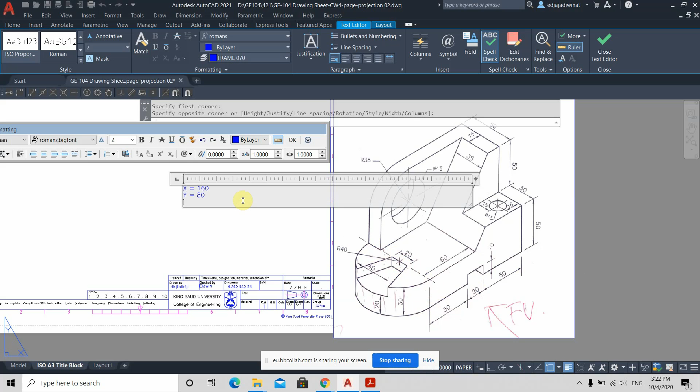100. Let's check together. Okay, 50 plus 50. Exactly, that's 100. Good. So now we have the x, y, and z.

I'll just enlarge the height of the font here. Let's make it 10. See, oh, that's too big. Make it 6. Okay, maybe that's okay. Oh, it's actually not that big. 8. Let's see, 8.

Doctor, did you start record? Yeah, sorry. I think so. Yeah, I think I started it.

Okay, so I'll just put it. Since we are going to have left side views, I will put it here. If you imagine, if you're going to make the left side view, that means here will be the top view location, right? This is the front view here, left side view there, and the top view here. So that's why I put this information there, so that it does not interfere with the top view.

Do we have to write it? This one? No, it's not. I made that just for you. Clear. Yeah, just for you.

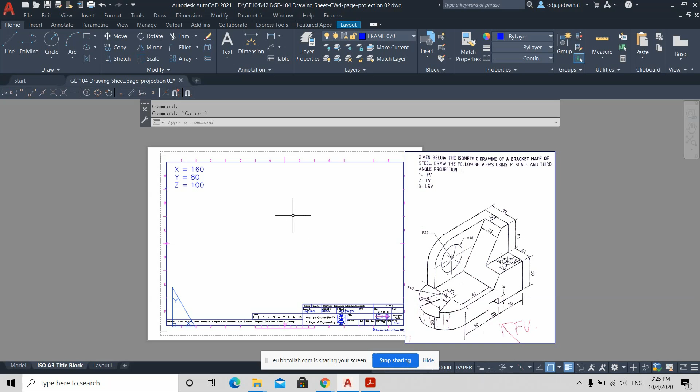So now let us do the other way. Let's make it exactly. I just want to show you how to make it exactly according to the A and the B. Anybody knows how to calculate the A and the B? Okay, let's do that together. You will have something like this, right? So B equal, can I give you the relationship that gives us the B?

Just a moment. Let me make this first before you inform me. Oh, okay, I did a mistake. I'll just Control Z. There. Okay. This is a random drawing. It's not the correct size. Okay, so this is the A. This empty space here, and here is called the A, and the empty space this, and that one is the B, right? Yes. Okay. So you can go ahead and inform me.

What's the A? A equal 400 minus x minus y. Oh, you mean, okay, if I put the brackets, it should be x plus y, right? Over 3. So over 3 will be the whole thing. All of these will be over 3. Okay, there. How about the B?

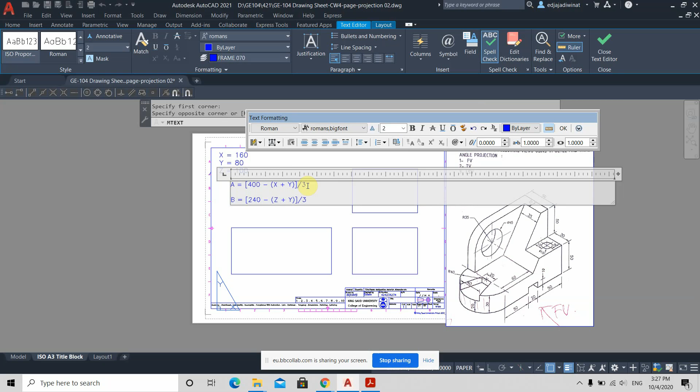240. Okay, 240 minus z plus y. Okay, z plus y in brackets, over 3. So you've got this as the equation to get the B. There. Okay.

So let's make sense of this equation. So the A is this empty space, right? So where does this come from? It comes from the size of this paper. So if I measure from here, from this corner to that corner is 400. Can you see that it's 400? Yes, we can. Right, the horizontal yellow line, if you look at it, it's 400.

Okay, so 400, your target is to find the size of the empty space. Then you need to minus the length of this line and that line, right? So this line from here to here is the x, and from here to here is the y. So that's why you add them together, x plus y. So 400 minus the combination of this line and that line. And the final result, you divide it by 3. Why? Because you have 3 empty spaces. 1, 2, 3.

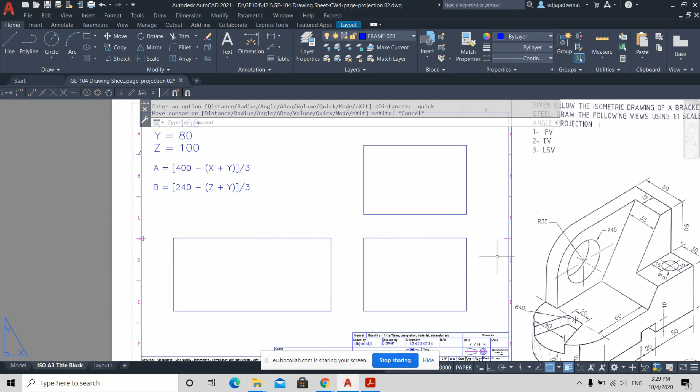The same thing with the B. If you measure this distance, you see it's 240. So actually here is 141. It's not a problem, only 1 millimeter difference. The function of A and B is just to make the location of your drawing approximately at the center.

Is that clear, everybody? Yes, doctor, it is very clear. Okay, good. So let's find what is the A and B. So that will be, if you calculate,

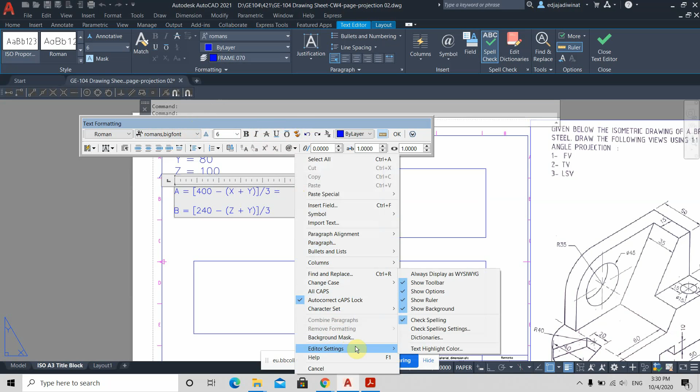this thing is, okay, I will turn off this thing, the text formatting tab or something. If you want to turn that off, do right click, editor settings, show toolbar. Yeah, you call that toolbar. I will just turn off the toolbar, because you can work from here if you want.

Okay. So let's calculate the 400. I'm using calculator here. So x plus y, what is the x? 160 plus y is 80. 160 plus 80, or 400 minus this, divided by 3. So we got 53.3333 and so on. Let's just put 53.3.

Okay. And this one, this will be 240 minus, inside of brackets, 100 plus 80. Z plus y, 100 plus 80, okay. Divided by 3. So it will be 20. There. Okay. I will delete this.

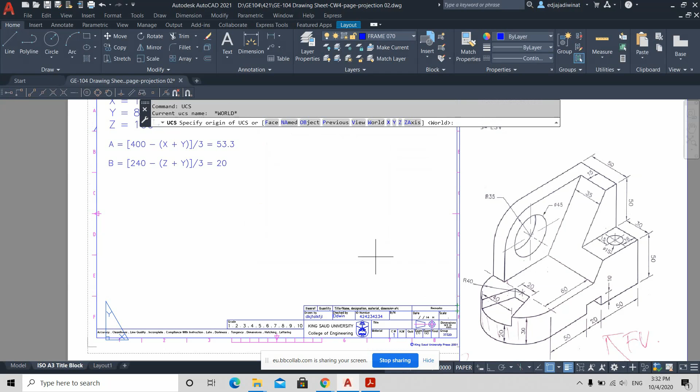Okay, let's do the work. I will use the UCS. I will move the UCS here. Sorry, I think I did a mistake. UCS. I will move it here because I'm going to make the first box the front view here. UCS is moved there. I'm happy with the position. Press enter. So I will use the rectangle command.

What is the front view? It will be the X and Z, right? But before that, you need to type the location of the first corner. So what is the location of the first corner? It will be somewhere here, right? Anybody can help me? What is the coordinates? We know already the A and the B.

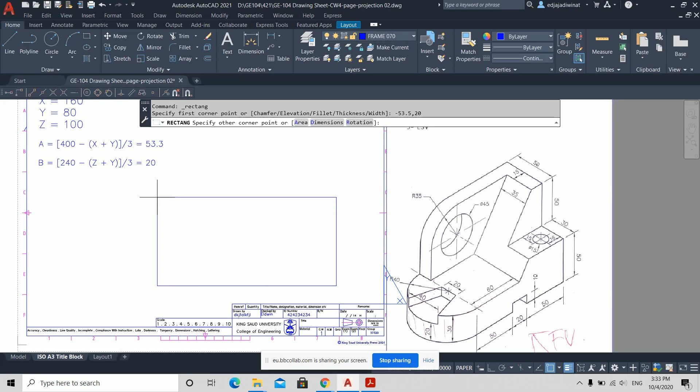So you must know where the first location. Minus 53.3, comma 20. Exactly. Good. So that is your first corner. And the second corner will be somewhere there, right? So now it's related to the X and Z of this object, not the X and Y of the AutoCAD coordinate system.

So it's different. So that means you will go at minus 160, comma 100, right? Do you understand that? Yes, doctor. You need to use symbol at, because this value is relative to the first point. Minus 160 because it's going to the left, comma the Z is 100 because it's upward, so it's positive. There.

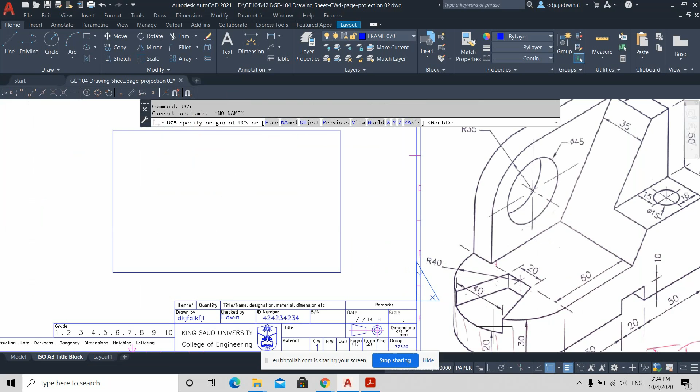Excuse me, teacher. For the UCS icon, how did you put it there? Use the UCS command. Type UCS and then enter. And then, of course, you need to turn on the object snap so you can catch this corner, the endpoint here. Then just click. And finally enter. Click origin or no origin, which one?

Let's repeat that. UCS, enter. If you read here, specify origin of UCS, right? So you just click there. And then specify point on x-axis. You don't need that because you are happy with this. So directly accept by pressing enter. Is that simple? Thank you.

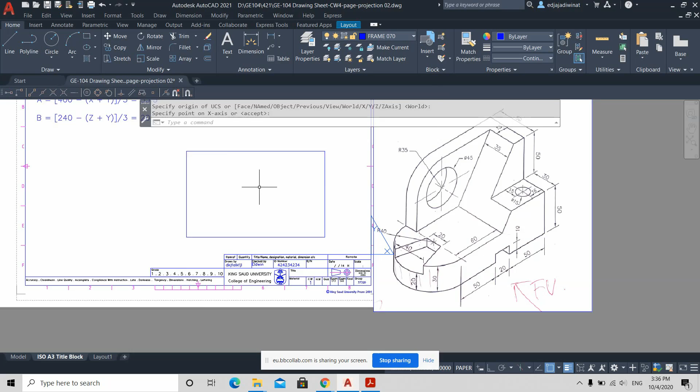Doctor, I can do it in another way, by clicking at the corner and putting a line and going 53.3 to the left, then you delete the line, right? Yeah, sure, you can do that. This is the technique that I showed you at the beginning, long time ago. So it's up to you which technique you want to use. That's why I gave you many options so that you know many ways.

Doctor, A is 53.3, right? Will we deal with it as 53.3 or approximate it? The A is this one, can you see in my screen? If you want to make it exactly or very close to the center, just make it 53.3. Make it accurate. It doesn't matter, because this is AutoCAD. This is not hand drawing.

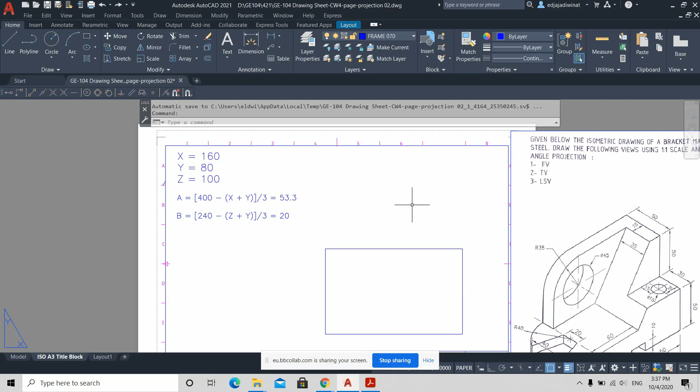And again, I would like to stress that A and B is not something rigid. Rigid means fixed, something that will really decrease your mark if you don't make your drawing really at the center. Okay?

Excuse me, doctor. I'm really stuck on this bottom left corner, the axis. I don't know how to move it there like you.

So where is it located now? Bottom left, yeah, this is because it's like flipped. Okay. So if you want to refresh, you just type UCS. And then if you see here, it's world already. Now it's okay. Forget about what I said.

If you want to return back to the original one from the AutoCAD, you just press enter. After you type UCS, press enter. Okay, now you will see your coordinate system is here, right? And that's because you did not turn on yet the origin position.

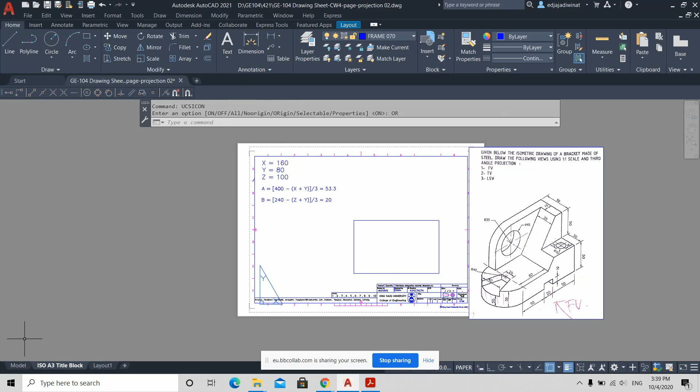So you go to UCS icon. You will see this option. Just click that, and then press this origin. Okay, now it will show exactly the location of the 0,0. So previously, if you don't turn that on, it will show the direction of the X and Y, but it's not showing the location of the 0,0.

Okay, just leave it there. Or you make a UCS command again and then put it here, put it on this location. If you don't feel comfortable using UCS, you can use the one that was used by your friend using the helping line. I got it, teacher. Okay. Thank you. You're welcome.

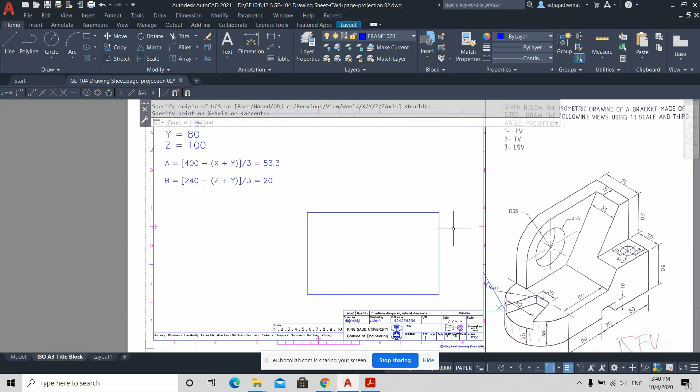Teacher, are you drawing the top view or the front view? This one is the front view, of course. Yeah, this is the X and the Z. So if you want to make sure, you use again the measure tool here on the top, on the ribbon. Measure, and you go there. So the horizontal is 160 and the vertical is 100. That means we are correct.

We can continue. I'll make the region for the left side view. A rectangle command as usual. And again, I'm using the extension object snap. Make sure the extension object snap is on. This object snap is to help you to make something on the extension of a certain line. For example, I want to make a point or start a line on the extension of this line, so you will use this, like what we are going to do now.

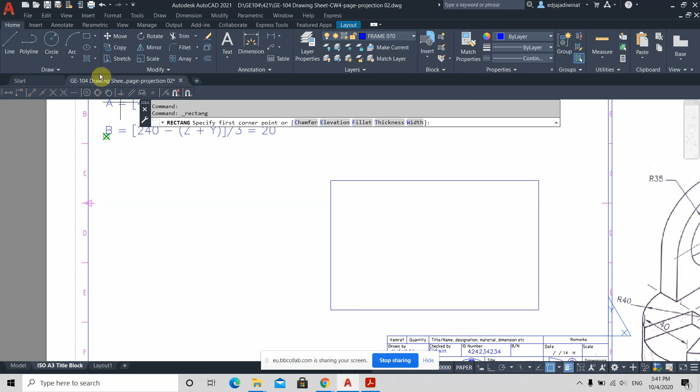Okay, I will use again rectangle command. I will go to this line first, to the end of this line. And then I will type the distance that I'm going to make here. The A will be 53.3, right? 53.3. Yes, teacher. That's right. Okay. So there you have it.

Now the second location will be the Y and the Z. Y is 80, the Z is 100, but you have to make it minus Y. Use the at symbol, minus 80, comma 100. There. Okay. See, 80, 100.

So use rectangle command again. And here we go up. This should be 20. And then this has to be at, as usual, and again this will be minus 160, comma, what, 100 or 80? I think 80. 80, exactly, because this is the Y. The vertical line is the Y of the object. There. Okay.

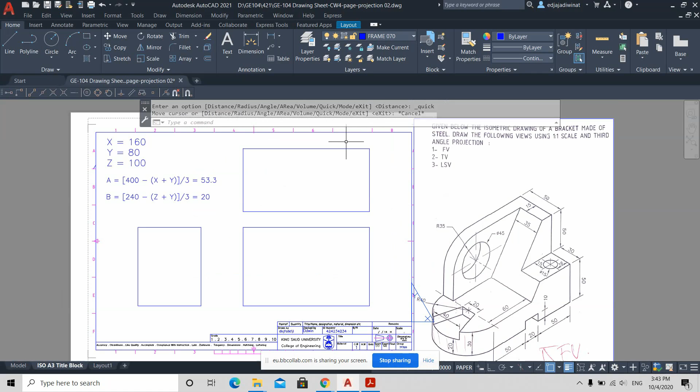So now you have nice views or regions to draw your view, and the distance is A and A exactly, and this is B and B. Of course this one will not be exactly 20, right? This will be maybe 21, because the distance that you have here is not 240 but it's 241. Again, this is not an issue, this is not a problem.

What is the important thing? You have the correct sizes of your boxes. You need to remember that you must have the correct size of the box. That is the most important thing.

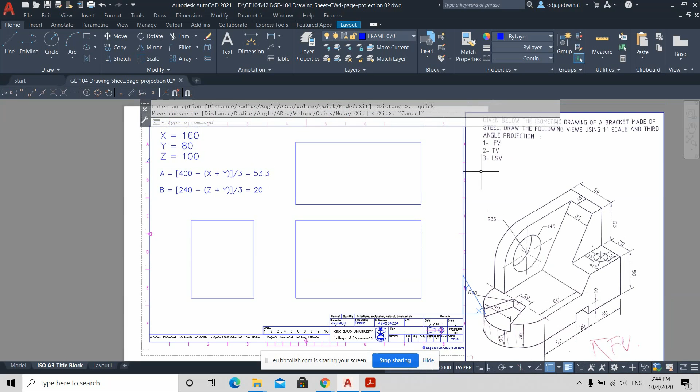Okay, so let's start making the front. Left bottom box, can you give the X and Y or Y and Z? Yeah, the size is 160 and 100. Can you see that? No, left. This one. It's 80 and 100. So the horizontal is the Y of the object, and the vertical line is the Z of the object. Okay, clear?

Okay. So let's make the object. We'll make the base. Okay, let's make the base. So if you see, the base is 30. So what I will do, I will offset from here, from the bottom of the base to the top of the base, which is 30.

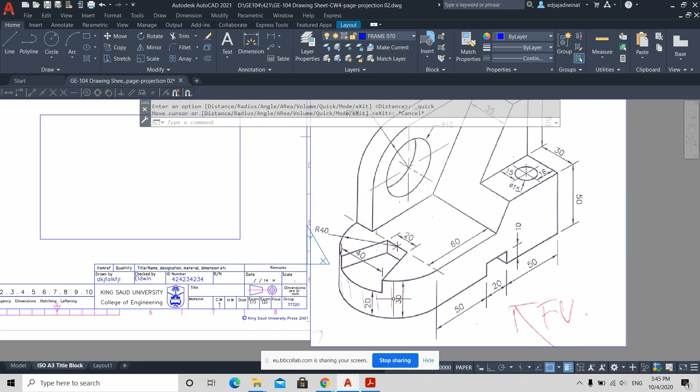However, if you see, as usual, when you make a rectangle using the rectangle command, they are connected. So you have to use the explode command to separate them. So use explode, select all of the rectangles, then press enter. So now they have been separated.

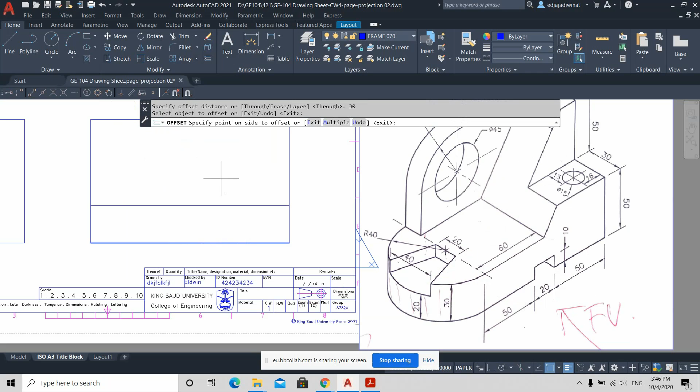So let's do the offset. Offset distance is 30, enter. From here, this is the object that you want to offset, and the location is above that original line. Okay. So we obtain this line already. And what's next?

Let us make this tunnel. There is a small object here. It's the tunnel here. Okay. See, so it is 50 from the right. It's 50 from the right. So you can use the line command.

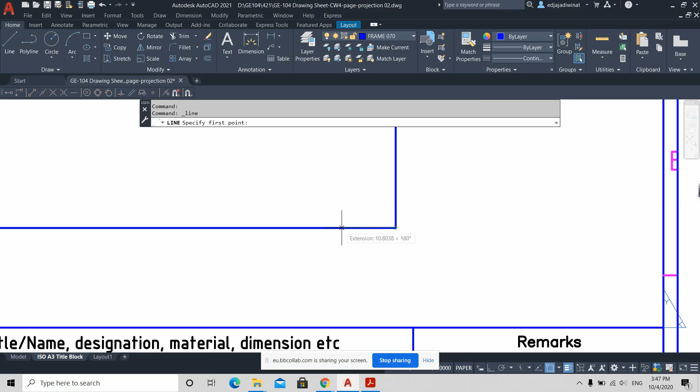So you go to this corner because this point is here. And you go to the left. Make sure that you turn on the extension. Okay. So the extension object snap is on. Extension is on. So don't go there, you go to the left. Okay, so you want to go 50 to the left, right? 50.

Let me try something. So here, if you put minus 50. So it's possible if you go to the right and then you put minus, then it will flip to the other direction. For example, like I do here, I go there, then I type minus 50. Then I enter, it goes there. Okay. Then you go upward. Now my line is able to go in any direction.

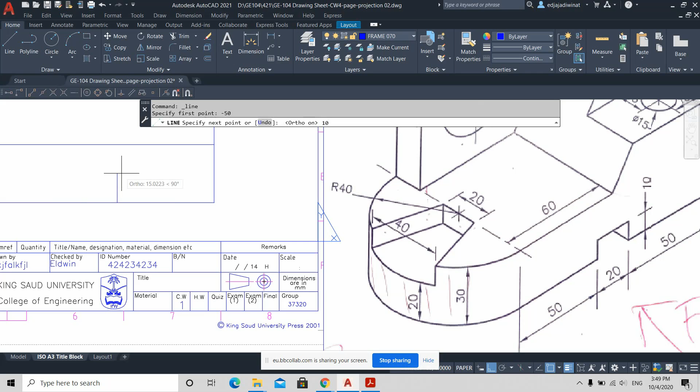To make it fixed, only vertical and horizontal as usual, turn on ortho mode. So when you're using ortho mode, it will only go vertical or horizontal. So you go in the direction you want to create your line. Okay, so it's 10 upward, and to the left is 20. Then downward, you just use the object snap until it cuts there, until it is perpendicular. There.

Okay, so see, it's 50 from there, and the size here is 20 and 10. Can you see that? Is everything clear until here? Oh, yes, it is clear. Okay, good. So if you want, you can trim the line on the bottom there now. Of course, if you want, you can use offset several times and then trim things. Can you imagine what I'm saying?

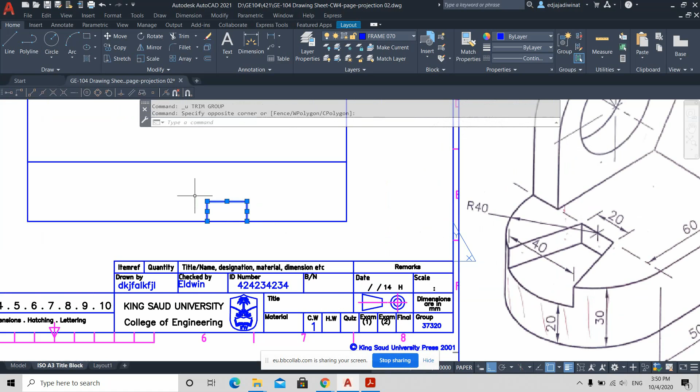Doctor, can you repeat how you did the tunnel? Okay. So I will just show you another way so that your other friends can see it. I've showed you before how to make the tunnel using the line command and the extension object snap. So if you want, you can also use the offset. Okay, I will use offset.

So I will make offset from this line 50 to the left. So the offset distance is 50. I'll make it like that, 50. Okay. Then I'm done. Escape. Then I know the distance of this is 20, right? So again, you make an offset 20. From this object, I want to go to the left 20. So you click on the left of that line, press enter.

The last thing, you know the height of this tunnel is 10. So you make offset 10 from here up. Once you're done, press escape. So this is your tunnel. Let us clean up by using trim. So I trim this, trim that. There. Okay. Also this one, sorry, I forgot to trim this. There. Okay.

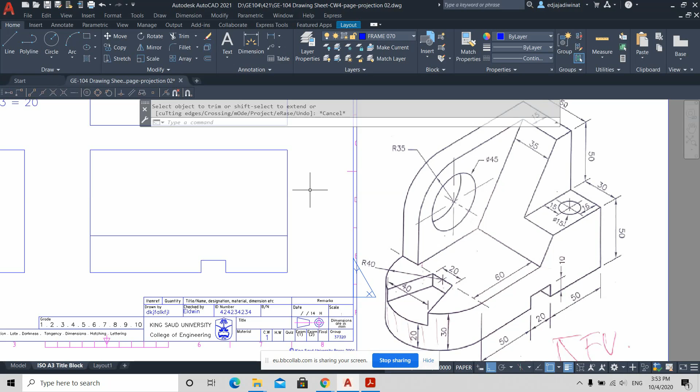Maybe some students don't really like to find what the coordinate is, I mean the x and y. They prefer, okay, what's the x? They do the x, and what's the y? They do the y. Then they trim. Maybe some others don't really like to trim. I will just make directly x y x y. So it really depends on you. I'm just giving you guidance, many options. It's your decision in the end. Is that clear?

Okay. So let us make this inclined region. Where is it? Where is this edge located? With the tunnel? Maybe, but there's no information. Middle? Middle could be. Okay, so if there's no information relating the tunnel to this thing, don't make a guess. That's dangerous.

You must be sure. It's 50 from the right? Exactly, I think from the right. I don't know, but I know from the left. If you see, this is 60. 60 from this line, which is the center of the half circle, the diameter of the half circle, right? So this is 60 plus what's from here to this edge?

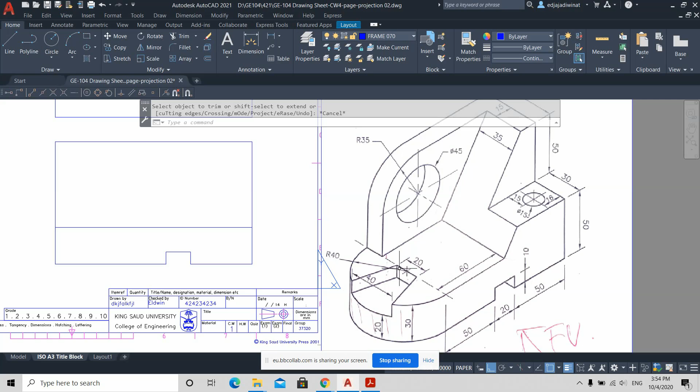40, exactly. So what's the distance? 10? It's 100. Yeah, it's not 10. It's 10 centimeters, but we are talking about millimeters here. Okay, so it's 100. So 60 plus 40. If I'm going to make it from here, it will be 40 plus 60. So it's 100. So I'll make offset 100, from here to there.

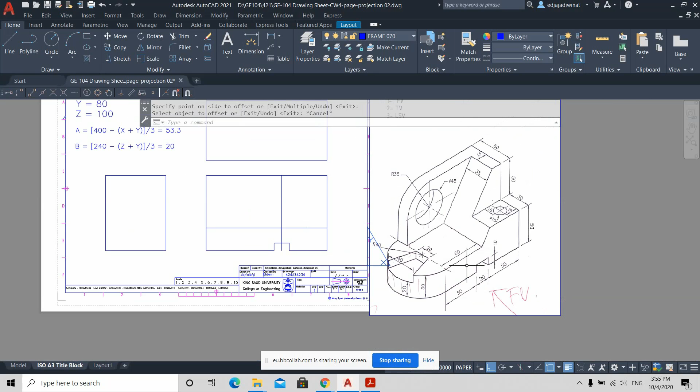Yeah, it seems at the center, but initially you don't know. At the beginning you don't know. Don't make a guess in a technical drawing. You need to make sure it's informed explicitly in the drawing. Like this one is explicitly said 60, and this one is also explicitly said it's 40. So 40 plus 60, it's 100.

Okay, so you know this point already, and then you need this point. So you can do offset 15 from here to there, because it is 15 there. It's given. Then you need to connect from this location to there. And of course you can delete these two lines, because these two lines are just to help you find this point and that point.

Okay, so what's the next step? Let's make this surface. If you look at it from the front view, you will see this surface as a line, which is this line, right? So I'm going to make a line, 50 from the bottom goes there.

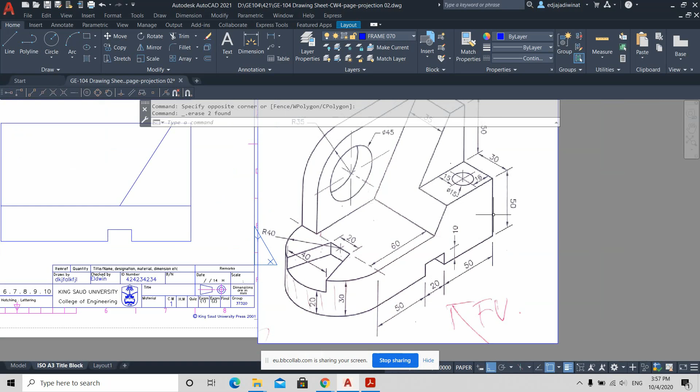So I will use a line command. Of course, you can use offset 50 from here if you want. You go there, and then you trim. It's also possible. Or you can use the line command: go here, type minus 50, so it goes up there, and then you just click there. It's up to you.

Of course, you will not see anything here on the surface. See, it's empty here, no edges. So this thing doesn't exist. You need to trim that. Okay.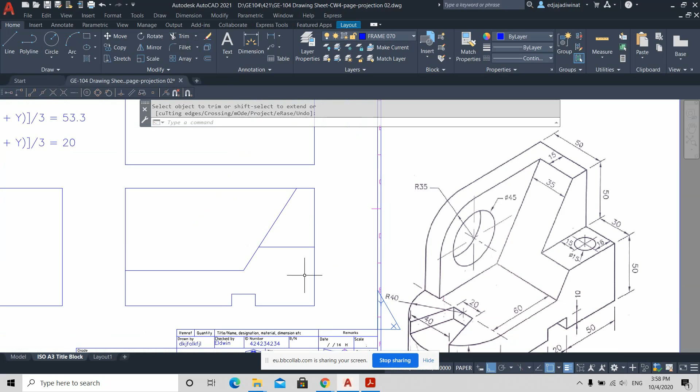Is everybody following? Do you understand? Yes, teacher. Okay, great. Just 1 minute, we are drawing. Oh, you are drawing it? Okay, good. Can I wait a couple of minutes? You can go ahead, draw. Okay.

The next thing, we'll make this wall. Okay, I'll continue. To make this wall, again, you need to find where it is located. It's clear that from this edge to this surface is 40, right? This radius. So you can make an offset 40 from here to there. Then you can trim these two lines because you don't need those.

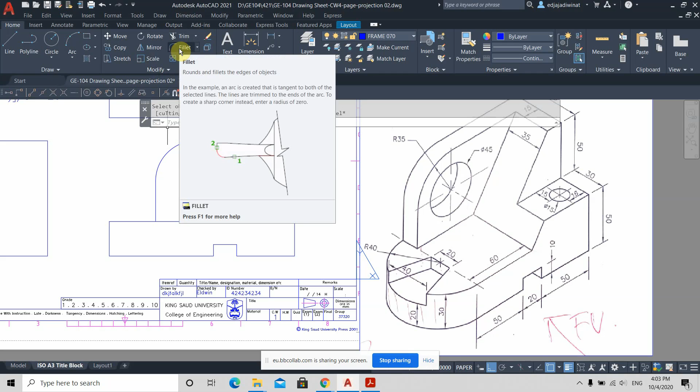Anybody still remember how to use the fillet command? Yes, I think we do remember, but for the circle you made, where's the first point? It says specify the first point. Or for the circle, the TTR command. Yeah, I did the TTR command. Now I should specify the first point. Yeah, so the first point is simply anywhere on this line, close to this region. There is no fixed location. AutoCAD will decide depending on the radius.

Okay. So you just click anywhere here, approximately. Here, and then the radius is 35. There. Okay. Yeah, I did it. Thank you. You're welcome. And you can trim here, trim that, trim these. There. Another option is using the fillet command. You can look it up in the previous videos or on the internet, how to use that.

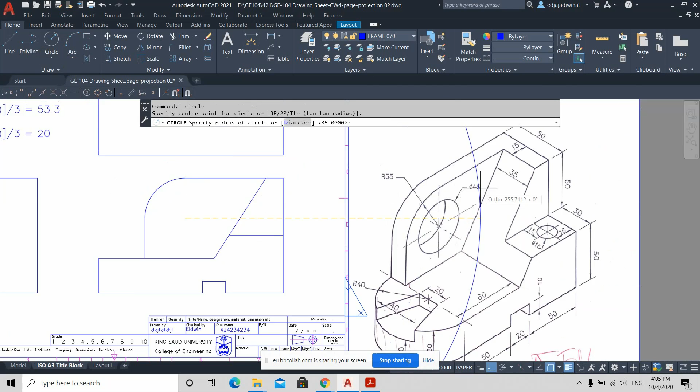Okay, next, let's make the big circle here, the full circle. And you catch the same center as the previous circle. And the radius, what is the radius? This is 22 and a half. Yeah, 22 and a half. Okay, just in case the number is bad and you don't have a calculator and you are lazy to calculate by hand, it says at the beginning, specify radius of circle or diameter. So you just click diameter if you don't want to calculate the radius. So now it's asking you the diameter instead. Okay, so just type 45.

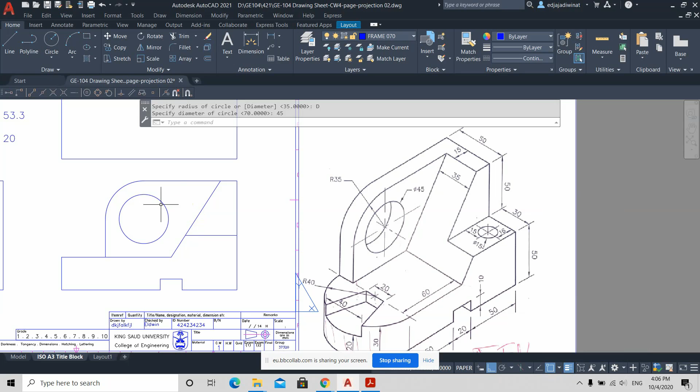How did you choose the middle? Sorry, why do I choose what? I mean, how did you know where the center is? Using object snap as usual. You need to turn on object snap and make sure that this object snap is on center. This is to catch the center of a circle. Let me repeat that. When I click the circle command, the object snap will automatically activate. Of course, you need to turn this on first. So you go somewhere near here, the green light will appear there, and you see center written there. So when you see the green light, you can click.

Did you get it? Yes. Okay. So it is the radius. Oh, okay, it's already there in the memory. I just press enter. There. 22.5 is the radius. Okay, what's missing? The hidden line. Yeah, right. The hidden lines of the circle, and also this thing. Okay, let's do the circle first.

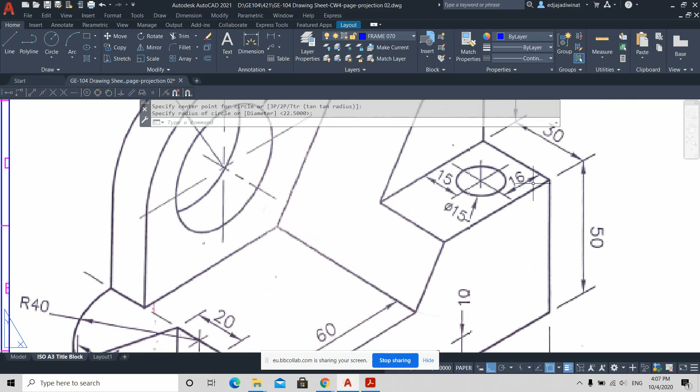It's written here, it's 16 from this wall. So I'll make an offset, or I'll use a line; both are possible. Now I will use line. I will go here. And I know it's 16, so from here, if I go to the right it's positive, but I want to go to the left, so that means minus 16, the opposite of the current direction. Minus 16. There.

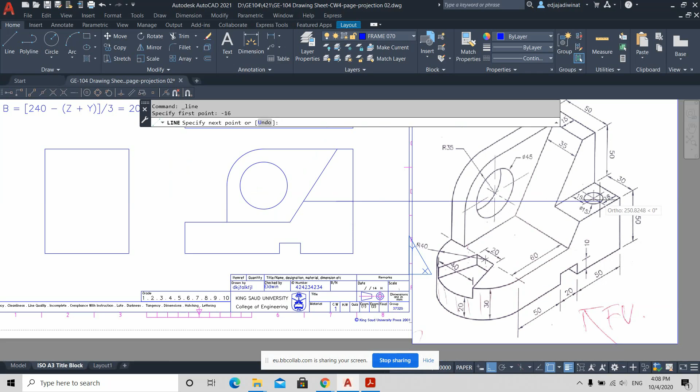Then if there is no information regarding the depth, how far it goes, that means it goes until the end. So this hole, the diameter is this, but there's no information regarding how deep it is, so that means it's all through. It goes till the end. So I will just go down to the very bottom and press enter or escape. So this is the center of the cylinder.

Of course, you can use offset as before. Offset 16 of this thing, and then you trim this region, the top line. Okay, I'll just undo. Now you know the center of this circle, or of this cylindrical hole, and you know the diameter is 15, right?

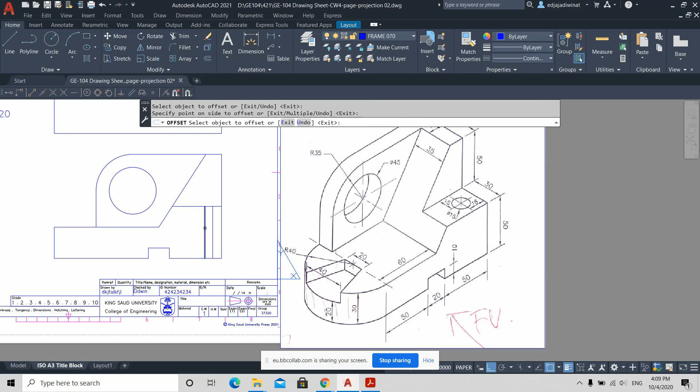So that means you can offset the center to the right 7.5 and to the left 7.5. I can do that. Offset 7.5. Okay. Goes there 7.5 and there 7.5. So now you are sure the distance is 15. See, 7.5, 7.5. Okay.

As usual, the center line has to be 5 milli outside the cylindrical hole or the cylinder, any cylinder actually. There, and you can change this to a center line type. Yeah, and this one should be hidden line.

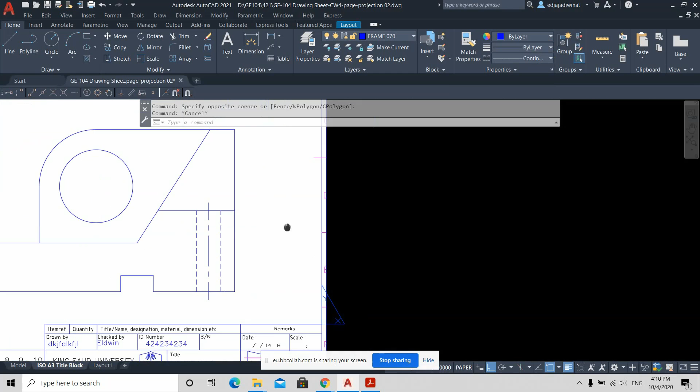What's the distance between each line? The distance, you can look at it here. This line is the edge, so it has to be what? The radius to the right and radius to the left. Okay, thank you. Okay.

And next, everybody reach here? Yes, Dixon. Okay. So we can make this one, but it will not be complete. I will let you know later why. So I can prepare things, but it will not be complete. Let us prepare the line. Okay. So this will be hidden. This will also be hidden.

What's the distance of this surface from the bottom? It's 20, right? 20, exactly. And from here to there is, of course, 40. So I will just use line in this case. I will go from here, minus 20 goes up, and I will go to the right, 40, right? The ortho mode is on. So 40 there, and I just connect there. Okay.

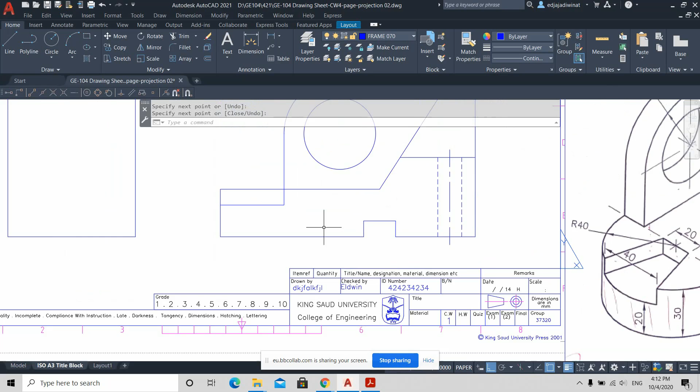However, this is not... It's hidden, exactly. So you can change this to hidden. Actually, not all of them are hidden, but for now I will make it hidden. Okay, I'll just make it hidden too.

I will show you why this is not complete yet. There's some visible line that you will see here, a little part, because if you imagine, it's cut here. It's cut, so you will see some step there. But you don't know where it is yet. You need to use projection from the top downward. So for the time being, I'll keep this. This is not done, but I'll make it anyway, and we will see what's the missing thing.

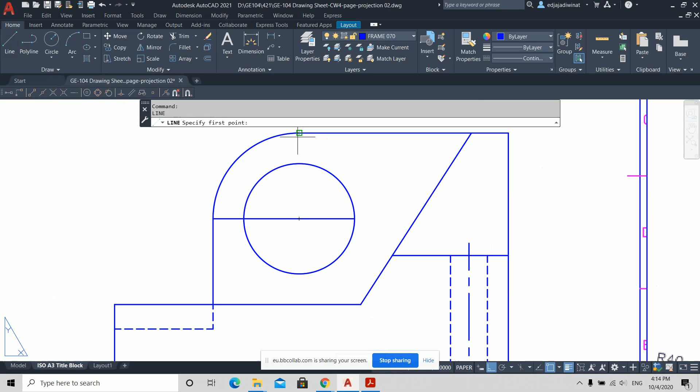Okay, before we move to the top view, let's make the center line. I'm still using the line command here. I have not taught you how to use the center mark command. Maybe in another video I will send it to you.

This, you extend 5 milli here. Oops, sorry. 5 milli up and 5 milli down. Then you can change these lines to center. Okay. So that's good, almost complete. Let's move to the top view.

Okay. From the top view, what will you see here? If you see it from the top, you will see there is a surface here. So it's like a rectangle, and an L shape, a big L shape here, and you have a rectangle there. Okay, let's start by making that surface.

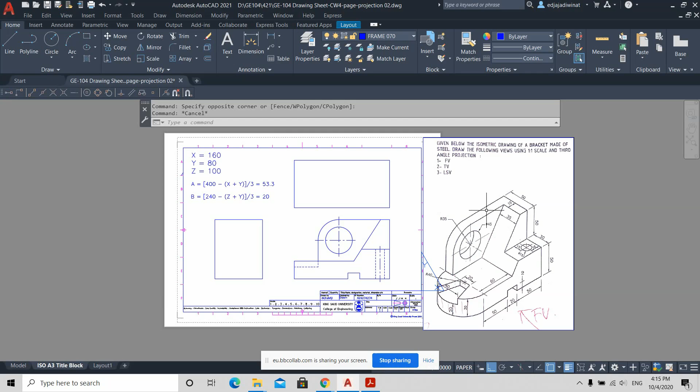So you can use offset if you want. I'll use offset for now. So the thickness of this wall is 15. It's not written here, but let us assume it's the same, 15. If you find something like this in the exam, you can ask the doctor what's the distance here. Okay, it should be 15.

Same. But first I have to explode, I think. We did already, I chose everything at the beginning. Of course, if you did not do that yet, you need to do explode. So I'm using offset like that, and then what else? You need to make offset from here also. Offset from the left 40, like that, and then you trim like that, right?

And then also let's make this thing. So you need to make offset again 15 from here to there, and it's only 50 from here to there, right? So I will escape the first offset. I will make another offset 50 from here to there. Then you will use trim. There. Okay.

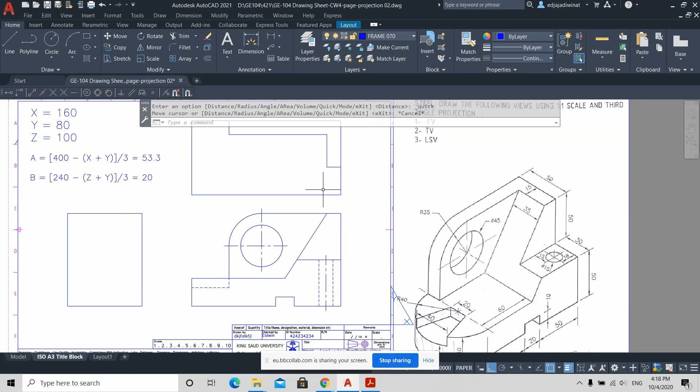Now we make 30. Which 30 you think? Oh, this one? This surface? Okay, yeah, we can do that. We can make this line. It is 30 here. The remaining here should be 30. If you check, yeah, see, it's 30. So we don't make it anymore because it's already the remainder.

But the important thing is this distance. Actually, it's not given. You don't know where this is. How can we know? We have to start from the left. Exact, from the bottom. Oh, you mean from the left here? Or from the bottom. Even from the left is not given. It's not an information. So this you must use projection.

For sure, I know there is a line from here to there, but I don't know where this line will stop, because there's no information about the distance from this point to that point, right? So you will use the projection from this point. Then you go up perpendicular to that and click. Press escape when you're done. And then you trim. There.

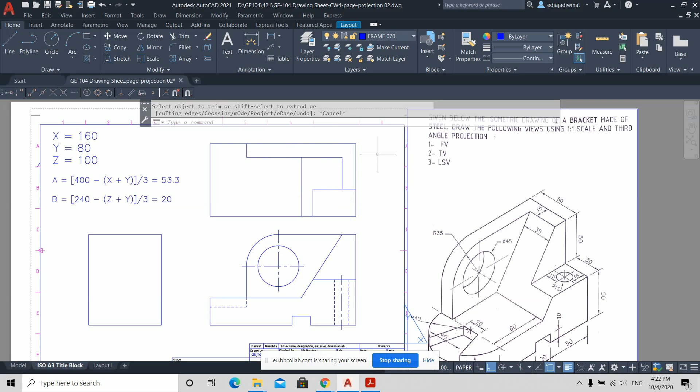So this surface, if you look at it from the top, it will be like an L, right? L shape, which is this thing. And this L shape is that one. Can you imagine that? Is it clear? Yeah, very clear. Yes, Peter, it's very clear. Okay, great.

What's next? Next, let's make this thing. I'm going to do first all the visible things, okay? So you will have this V shape or trapezoidal shape. So you will need this line, right? Okay, let's make this circle first. The center will be 40, comma 40, of course from this point.

To find the center, you can use the helping line, like your friend did, or you can make an offset. Many students like to use the offset. Offset from here 40, there 40. The intersection between these two lines is the center of the circle. Of course, you can use the helping line: make line 40, comma 40 to reach this point, then make a circle. Both are acceptable.

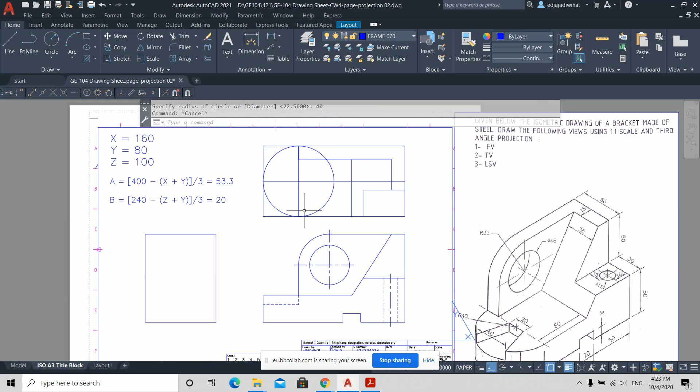And then if you feel this is too crowded, you can trim the lines that you don't need. This one, I will just delete the whole thing because I will use the delete command, not trim. And I'll keep this for the center line as usual. And I'll trim this. There. Okay.

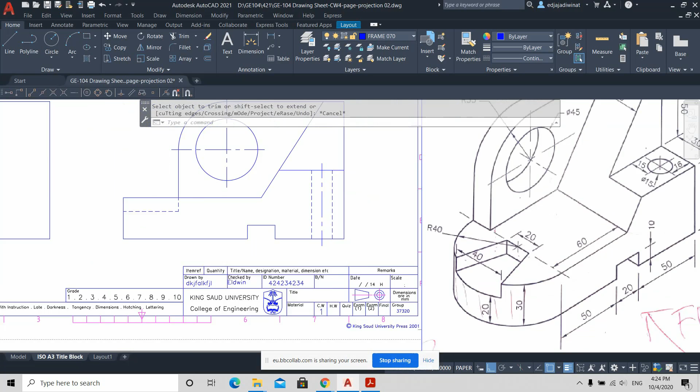And you will have a region here, this edge. So it's 20. So I will offset the center line 10 to this side and 10 to this side. Just offset, the distance is 10. So now I know that the distance from here to here is 20. If you want to make sure, it's 10 and 10. So again, this is only a helping line to find this point.

And you need another two locations, 2 points here, right? How to obtain this? Anybody know how to obtain these 2 points here, so that you can connect this and that?

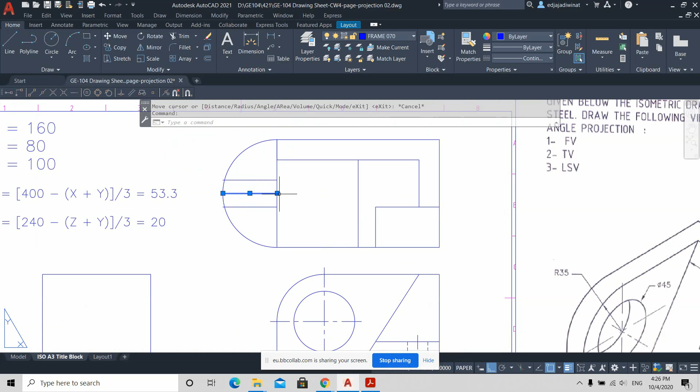So I will now start from the center of the circle, exactly, then go 10 up and 10 down, and make a line until we touch the outside of the circle. Now we did already 10 and 10. So now you know these 2 points, this and that, right? We obtain those 2 points. But now you need these 2 points.

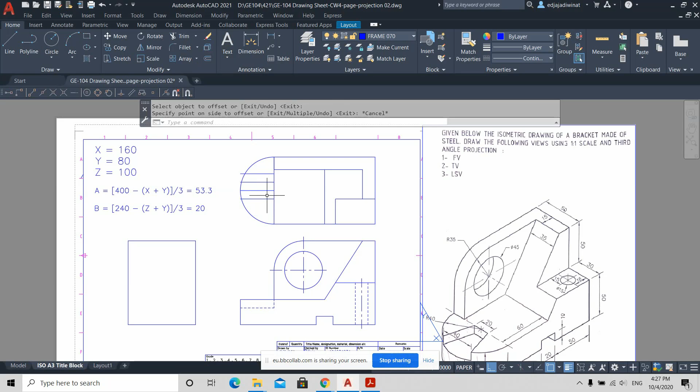Could you repeat? 22.2. Exactly. Good. So you need to make offset 20 because it's 40. If you see, it's 40. So from the center, you will go offset 20 and offset. Oh, okay, I made a mistake. It should be from the center, from this one. Offset. Which one is there? This is the center. So there.

So now you have this point and that point. So finally you can connect this and that, and this and that. There. Now you can trim, or you can even delete these two lines, not needed anymore, because it's just a helping line to find these points. There. Is it clear?

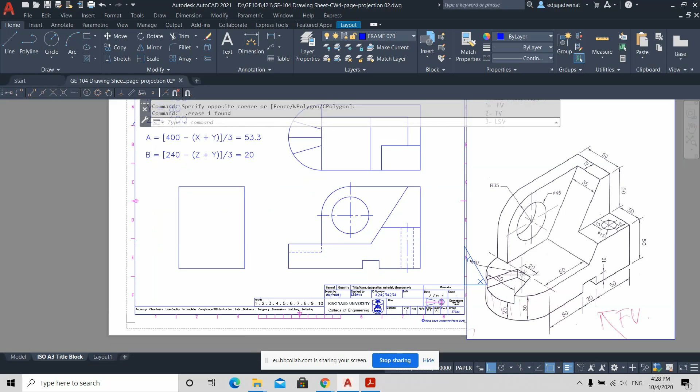It's clear. What about the center of the circle? How did you obtain it? For the center of the circle, I used offset before, because I know it's 40 from this wall, 40 from here and 40 from there. So you just offset 40 and 40 from here. Oh, okay. It will intersect. Or you can use the helping line like we did before.

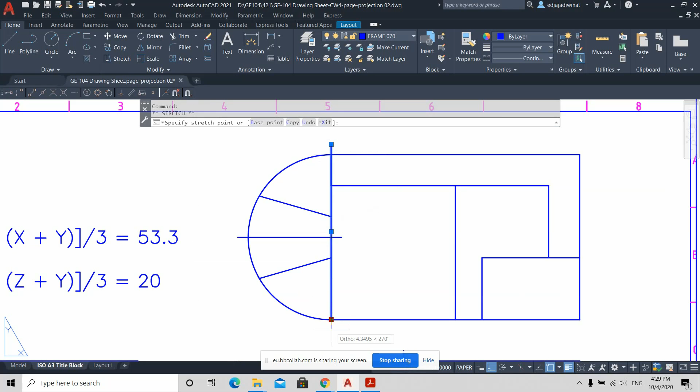So I'll just extend this. Like this one, I'll just put it something like that. Oops. It's 5 mm here. Okay. Is everybody clear until here? So now what remains?

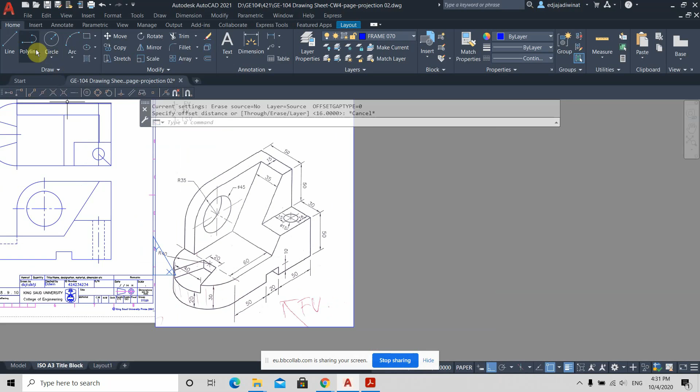The radius will be 7.5. You can use offset if you want, as usual. Offset 16 from here to there, and this offset will be 15, because 30 minus 15 is 15. Or you can offset from here, same, offset 15. So the intersection there is the center.

Okay, I will trim. There. Is there anything missing now? Can you see something missing? Yes, doctor. Okay, what is it? The big circle. The hidden circles. Yes, this one. So two things actually: this tunnel, and this circle.

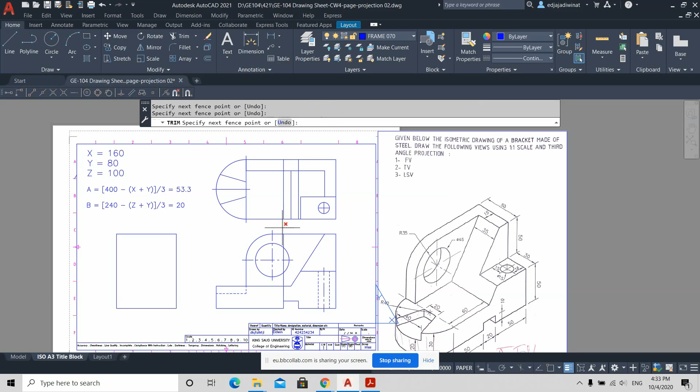So you can make a projection from here and go until the end, because as I've told you, if there's no information about the depth of a hole, it means it goes all the way to the back. So just go from here, and if you want, you can use the extension. There. That's how you can trim anything that you don't need. And this one I will just delete. I'm not trimming because trimming goes one by one. So I just select and delete. These two lines will be the hidden lines.

Then you have this circle. Again, you can use projection. I will use the center line as the reference, and then I will trim that line. I will also trim this one. So this is the center of this circle; I will not extend it first, later. If I know the center, I can find the edge. The edge will be half to the right, half to the left. So I'll make offset 22.5 from here to there, and from here to there.

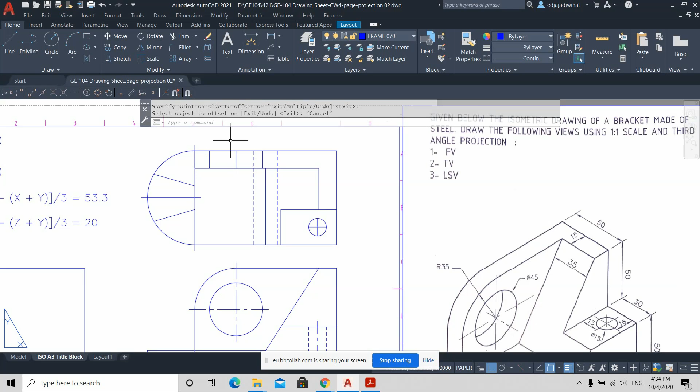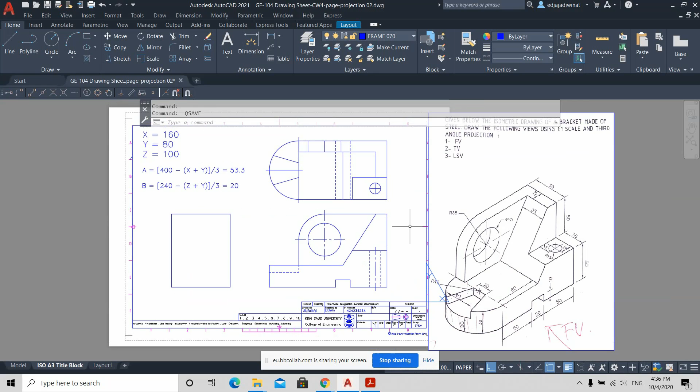Is everything clear? Yeah. No, I think the share screen has stopped. Your mouse is not moving in my screen. Oh, okay. Let me check. It stopped moving. Okay, let me. Just a moment. It shows that your connection is not good. Okay, let me save the work first. How about now? Is it moving? No, doctor, not yet. Okay, I'll stop the sharing and I will restart my internet. But be careful of the recording. No, I think it's good. I turned off the sharing already.

Okay, let's share the screen again. Is it good now? Yes, doctor, it's clear. Okay. Where did you reach before? So I will repeat several steps back then. Okay, I'll just delete these things.

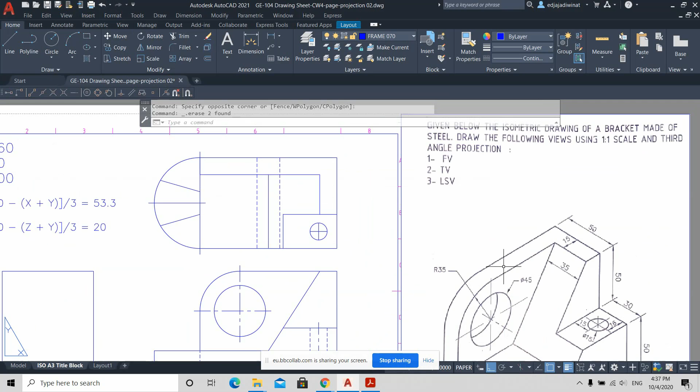So now we are going to make this a circle. From the top, this big circle will be hidden, right? It will be somewhere there, hidden lines there. So I will use the projection technique to do that. I'll just project the center line. There.

And since I know the center line location, I can make the two edges. That means from the center, this will be radius to the right and then radius to the left. So I will use offset. Radius is 22.5. Enter. From here, 22.5 to the right and then to the left. Okay, so you can change this as hidden.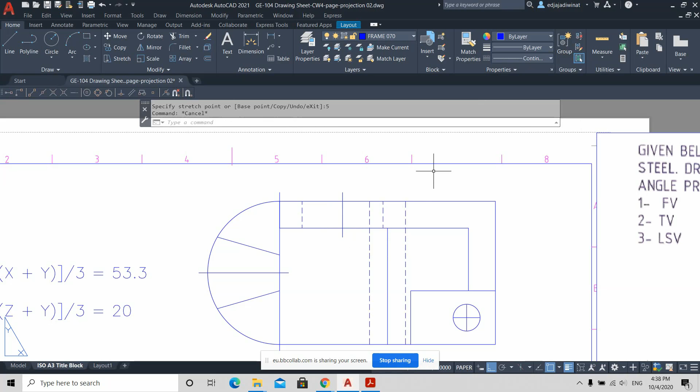So this and that should be hidden, right? And this should be center. As usual, the center line will be 5 millimeters outside the cylindrical hole. Same thing here, you do the same.

There is one thing, teacher. Can you show us the? Okay, just a moment, I'm finishing this first. We didn't do the hidden line down. Which hidden line? No, the left. This one? Yeah, from the top it's not hidden anymore, right? You can see it clearly. Yeah, but we didn't do the projection, so we see the visual thing. Oh yeah, we are not done with that part.

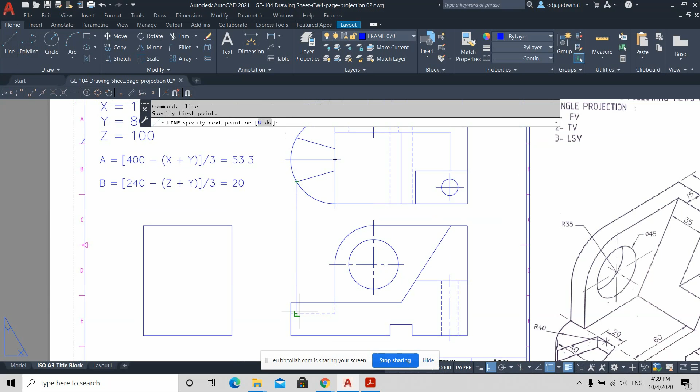So for this, overall it looks done. But as I told you, we skipped this part because we needed to make the top view first to finalize this. So if I project this here, I go down until there. Now you know the location of this edge. You see this short straight line? At the beginning, you don't know where it is located. Now you know it's located here. From where? From the projection of the top view.

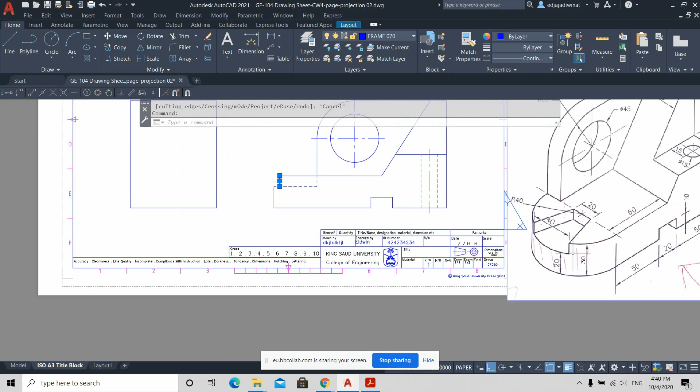So now you need to trim this and that. Of course, this one you don't need. Now you have a visible line there, which is this vertical line. And actually this edge location will be visible, right? So from this point to the left will be visible, meaning from this point to here. But now your line is one set like that.

There are two ways. You can break this line into two separate lines, or you can reduce the size of this line. I will stretch it there, because the hidden line is only up to here. Then I will use another line there, because this will be 0.7 and this will be 0.3. Do you understand why I did this? Yeah, it's clear.

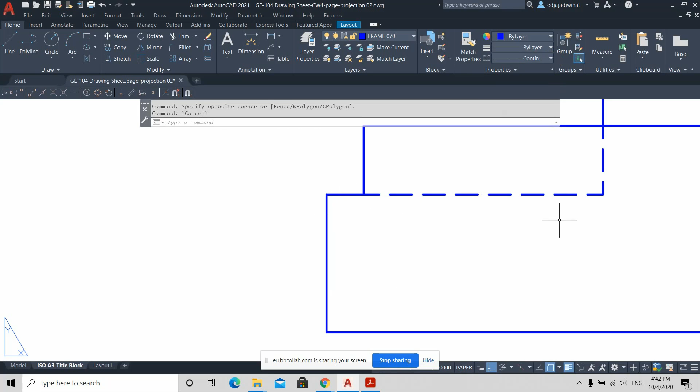Another technique is you can break this line. Let me see where the break is. I think this one: break at point. You click that and you select the object, the line I want to break. You specify the breakpoint. I want to break it here. Now you see they are separated. So now you can change this line's properties to continuous line. Is that clear? Yes, doctor, it's clear. Okay, good.

So let's finalize the line weight, the properties. I will change these to line weight 0.7. Of course, then you need to change the others, the hidden lines and center lines, because all of those will be 0.3. 0.3, 0.3, 0.3 there.

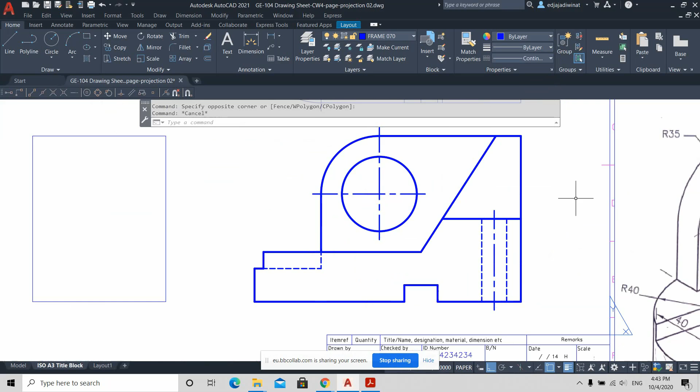See, you see the difference, right? Okay. The same thing here. I think we have not changed the properties here. I can change it directly. The line weight should be 0.5, sorry, it should be 0.3, not 0.5. And this should be center. Okay, it should be center.

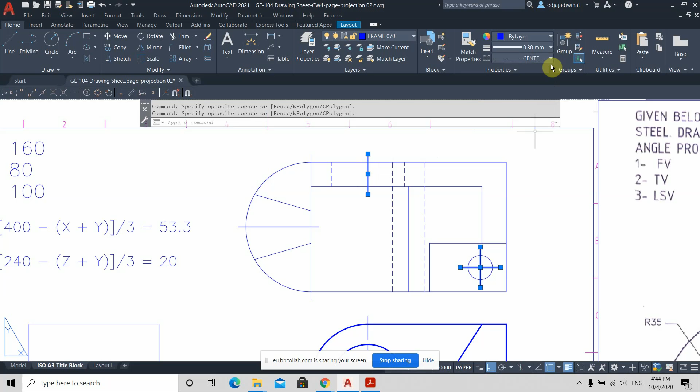If you see here, these two lines, it doesn't show the center line shape. I've changed it already, actually. Can you see that? When I select these two lines, it's changing to center already, right? Can everybody see that? Yeah. But with our eyes, we cannot see. Do you know why it is like that?

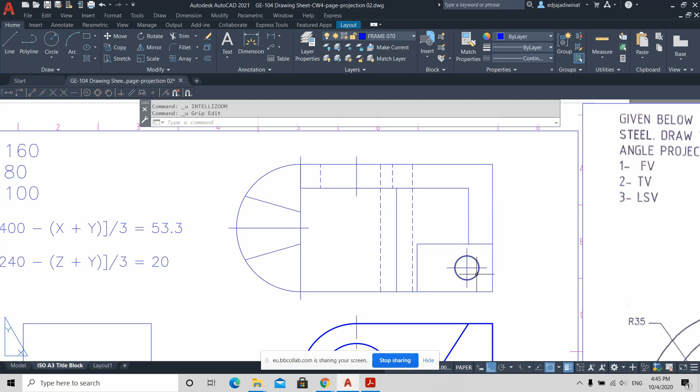We have the same problem. Yeah. This is because the line is short. Actually, if you extend the line, then it will appear. But of course you can't extend the line because the rule is 5 milli outside the circle, right? So how to solve this? When you have a short line, you need to change the line type scale. You need to decrease the scale, make it smaller. How to do that? I will show you now.

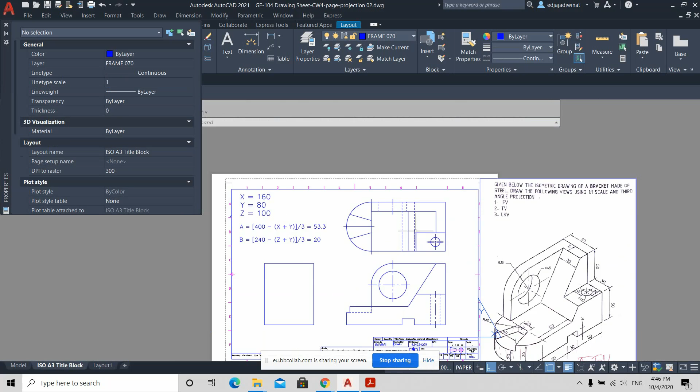So it's already center 2. Make sure it's already the line type that you need. And then select the lines that you want to change the scale. Then right click, properties. So you see here the line type scale is 1. So make it smaller. It's something like trial and error actually. So let's say 0.5. Does it show? Yeah. So when you put 0.5, you will see the center shape. You can try 0.7. 0.7 is also possible.

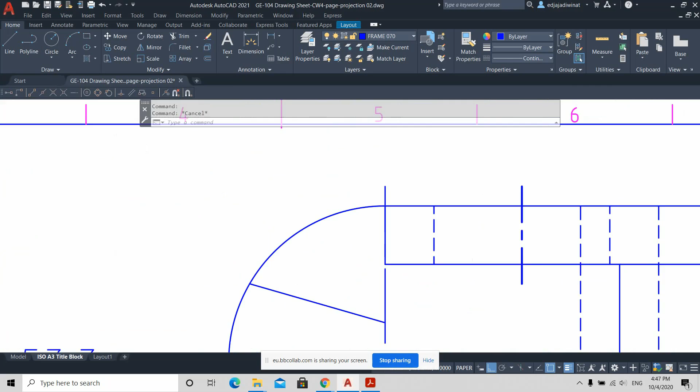And what's next? Oh, here. Actually, this one is the center line. Let's change this to center line. However, if you look at the object, on the middle you have a visible line, right? The 20 millimeter line. So how do you deal with this? Anybody know? We put it as a 0.7 line. Yes, exactly. But the problem, this is one single line. If I put 0.7, so the center line. Yeah, go ahead.

We put it on top of it. Okay, you can do that. You can put it on top of it, or you can break this if you want. This will be the center. This will be the visible line on the middle. So that's also possible. I cannot select the one behind. I will just right click, send this to the back, so I can select the short one. So the short one here is 0.7. There.

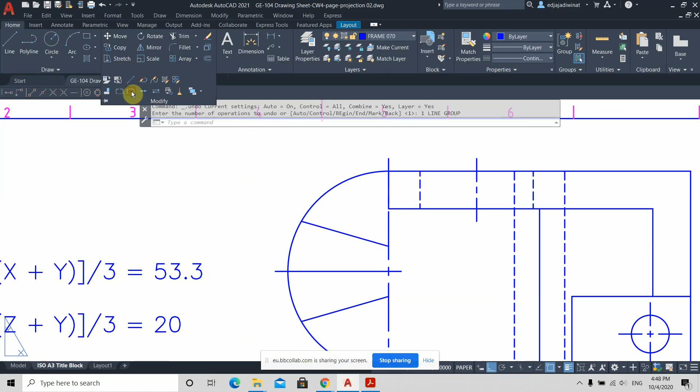Or another possibility is you break these two lines, or trim before you do it. So I will break this using the one that I've showed you before, break at point. I will break this line here, and then I will repeat. Break this line there. So now it's separate. If you want to break at 2 points, you can use break between 2 points, so you don't need to repeat the break command 2 times like I did.

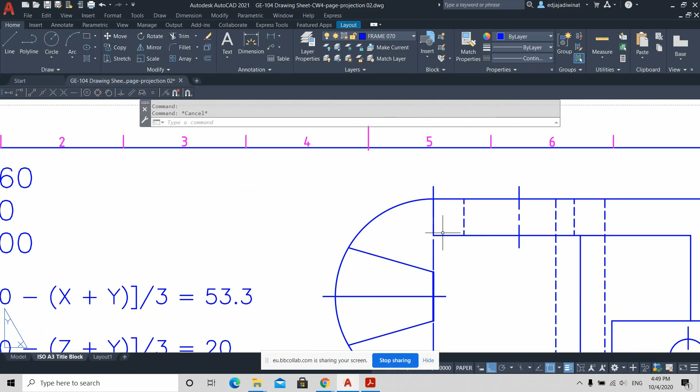Okay, now you can change this as a continuous line and 0.7. And this one, I will give a gap like 1 milli, so it's not connected. Or let's see if it's 2 milli. Yeah, I think 1 milli is better. And you have this as a visible line. This surface here, when you see from the top, is a visible line, so make sure that it shows. I will send this to back so I can select this line. This has to be 0.7 because it's visible.

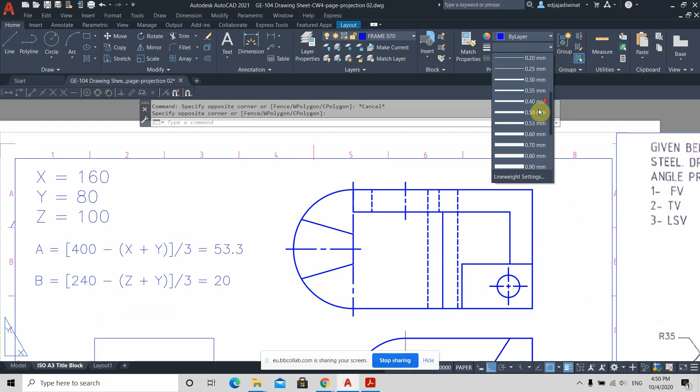Okay, let's finalize this. Center 2. Now I will select these. Everything is 0.7 except these lines. These 2 lines are hidden lines, so those need to be 0.3. You forgot this one. This has to be 0.7. So now your drawing is complete for the front and top view. So your task is to complete this and make the left side view, and you can submit it.